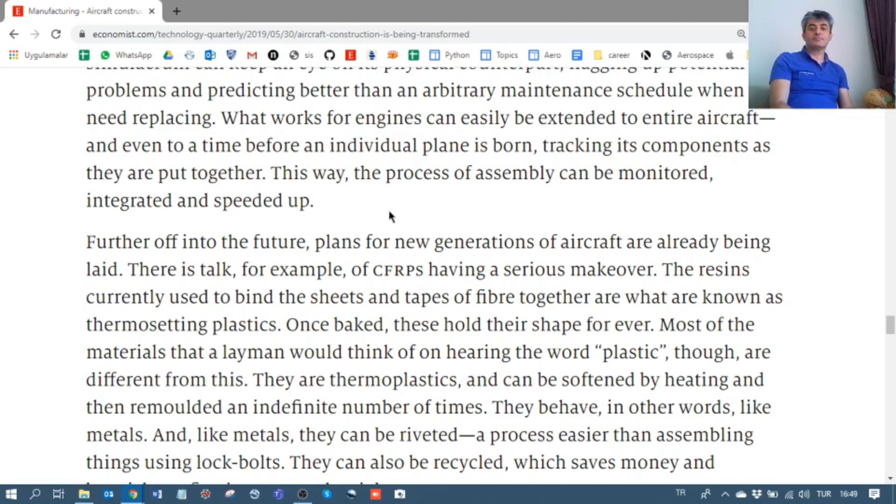This way, the process of assembly can be monitored, integrated, and speeded up. And we know that it must speed up, and it must do so reliably. Think of the 737 MAX tragedies. So, next,

aside from the manufacturing line, we also have a paragraph talking about carbon fiber reinforced plastics. This is somewhat further into the future, not really very close yet, but plans for new generations of aircraft are already being laid. There is talk, for example, of carbon fiber reinforced plastics having a serious makeover. What's wrong with them? Let's see. The resins currently used to bind the sheets and tapes of fiber together are what are known as thermosetting plastics. Once baked in the oven, these hold their shape forever. So they are not plastic in the real sense of the word.

Most of the materials that a layman would think of on hearing the word plastic, though, are different from this. They are thermoplastics. Normal plastics, most of them are thermoplastics. This is why you see people on the streets looking for them, because they can be recycled. But the resins used in the carbon fiber reinforced polymer business are not. They can be softened by heating and then remolded again. They behave, in other words, like metals.

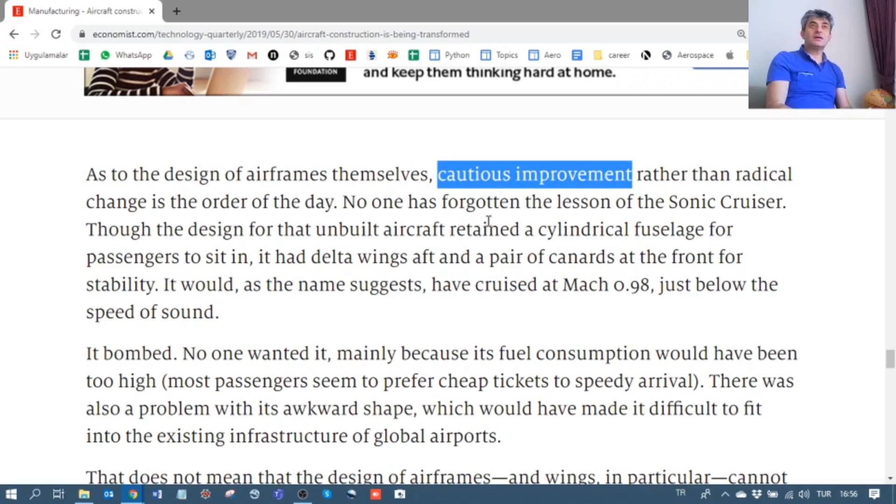Now, let's come back to the larger picture. As to the design of airframes, cautious improvement rather than radical change is the order of the day. Now remember, this is the thesis of this whole report. Cautious improvement, a tinge of conservatism rather than radical change. Radical change, innovation, invention is not the order of today. So cautious improvement. This is a good way of thinking about the improvement in airframe technology. No one has forgotten the lesson of the Sonic Cruiser.

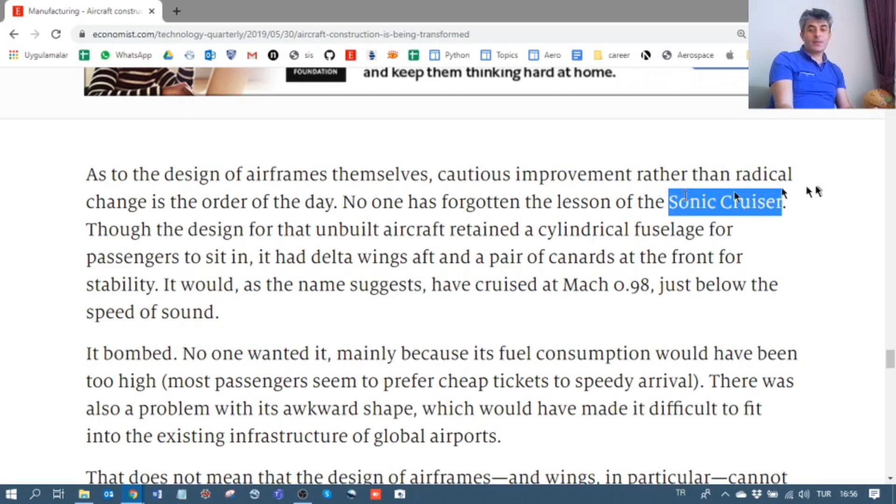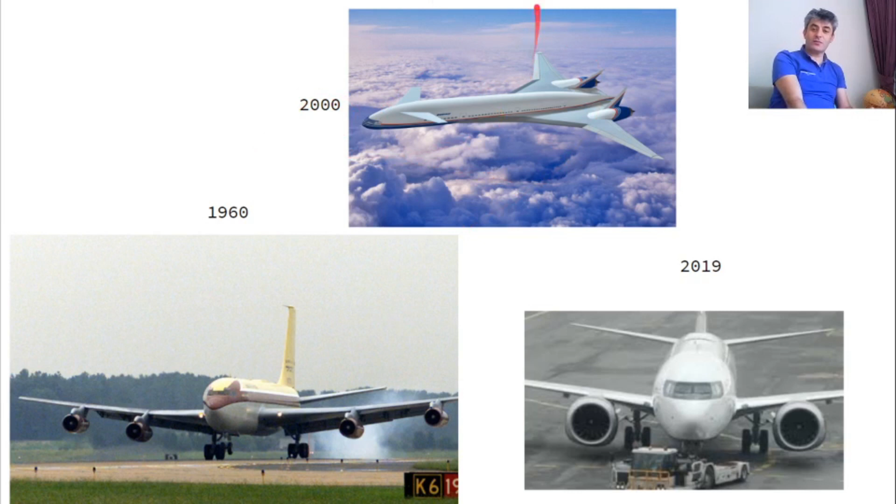We have a picture of the Sonic Cruiser in our presentation. It's here. So this is the Sonic Cruiser 2000. Have you ever flown in one? No, no one has ever, because this wasn't built at all. Why wasn't it? A very brief, oversimplified answer is because it was too radical to be built in many different senses. I suppose it's more radical than the Concorde itself.

So this airplane was never built because it was too radical for everybody. And also the fuel consumption, as we will see in a moment, was not on par with the other solutions. Though the design for that unbuilt aircraft retained a cylindrical fuselage that looks the same for passengers to sit in, it had delta wings aft, which means at the back, and a pair of canards at the front for stability. Those small wings at the front.

It would, as the name suggests, have cruised at Mach 0.98, just below the speed of sound. It bombed, didn't work. No one wanted it, mainly because its fuel consumption would have been too high. Most passengers seemed to prefer cheap tickets to speedy arrival. There was also a problem with its awkward shape, to put it very bluntly, which would have made it difficult to fit into existing infrastructure of global airports. Well, it seems some conservatism is at hand.

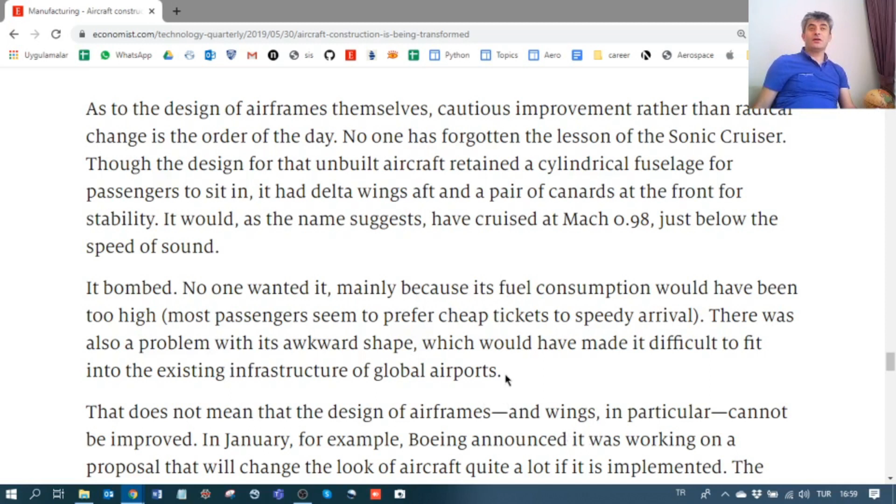Nobody is prepared to change the airport infrastructure for a plane or build a completely new airport for this awkward looking aircraft. It takes some boldness to say it's an awkward shape. It is a different shape, nevertheless.

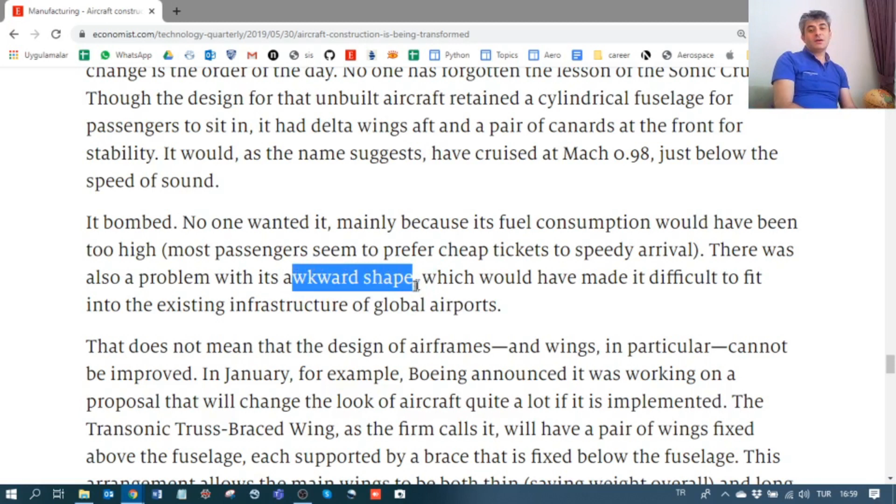I hope you are also enjoying this high quality reportmanship. I'm really happy that I am reading something coming from the frontiers of aerospace manufacturing technology. That doesn't mean the design of airframes and wings in particular cannot be improved.

In January 2019, Boeing announced it was working on a proposal that will change the look of an aircraft quite a lot if implemented: the transonic truss-braced wing, as the firm calls it. I'll show a picture of this, there's one in our presentation. It will have a pair of wings fixed above the fuselage, each supported by a brace fixed below the fuselage. This arrangement allows the main wings to be both thin, saving weight overall, and long, which reduces drag.

Remember, the higher this ratio, the higher the lift. The upshot is the eternal desideratum of better fuel economy. So this is better fuel economy. Let me show you what it looks like.

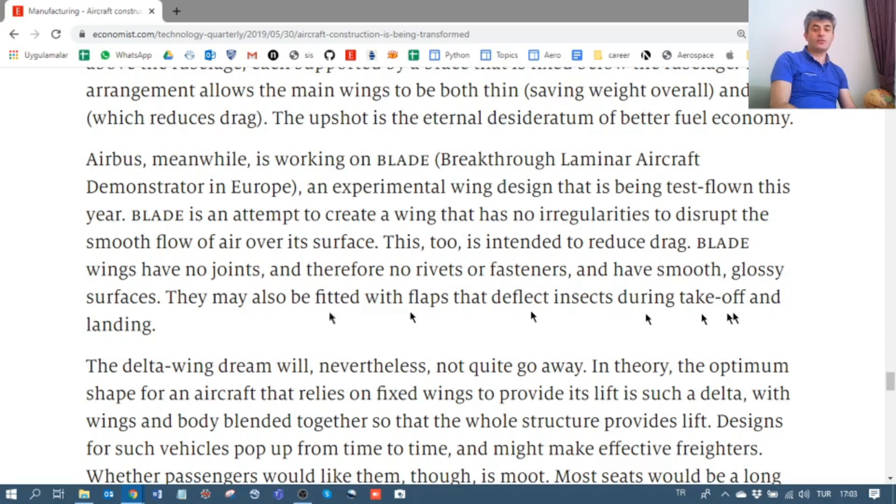And let's have a look at it once again. So this is the BLADE wing due to Airbus. I have a nice video from an engineer on this team, the lead engineer I guess, explaining the technology and the promise of this mirror-like shiny wing.

Okay, let's conclude the manufacturing article by discussing the promise of delta wings. It's a dream, not going away yet, as the article says. In theory, the optimum shape for an aircraft that relies on fixed wings to provide its lift is such a delta, with wings and body blended together so that the whole structure provides lift.

Designs for such vehicles pop up from time to time and might make effective freighters, cargo planes. Whether passengers would like them, though, is moot, uncertain, and probably not. Most seats will be a long way from a window, and evacuation in an emergency might be hard. So it concludes, don't expect them soon.

So this concludes our discussion of manufacturing. I would like to go back to the presentation file to recap what we've discussed. We talked about connectivity and digital twins. This is already done for most jet engines, and it's coming to whole airplanes, aircraft.

We learned that sensors on board the A350 transmit about 30 gigabytes of data every day. So generation of data from many sensors helps assess the integrity of the whole structure and its components.

Next, we talked about the promise of biotechnology, instead of the use of spider silk, maybe not in the near future. A German company is actually furthering this research and manufacturing, so I have a YouTube video from that company that will tell you more. It's interesting that molecular biology and genetics is going to add a lot of value, or have the potential to add such value, to aerospace technology. I'd like to highlight that.

And then coming back to our discussion on conservatism and innovation, here is a Boeing program that is going to create extremely thin wings by means of a truss structure. And then we discussed Airbus's BLADE, smooth, shiny, mirror-like wings that will reduce drag and increase efficiency for the sake of decreasing fuel price, etc.